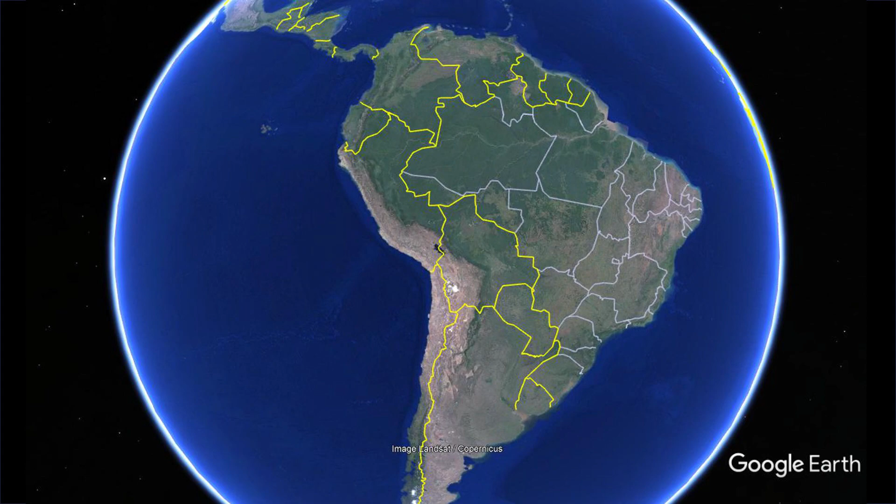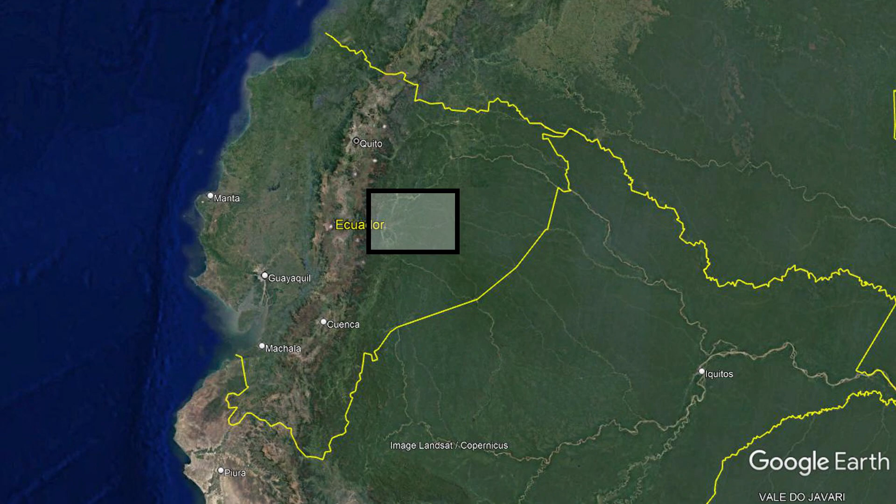The first thing, I want to show you some pictures from where I come from. This is the jungle in Ecuador. To see where Ecuador is, this small country that you will find between Colombia and Peru. Ecuador is divided in three zones. You can see the coast, the mountains that cross all the country, and they reach over 6,000 meters above sea level. And on the east, you have the Amazonia. There is where our university is placed.

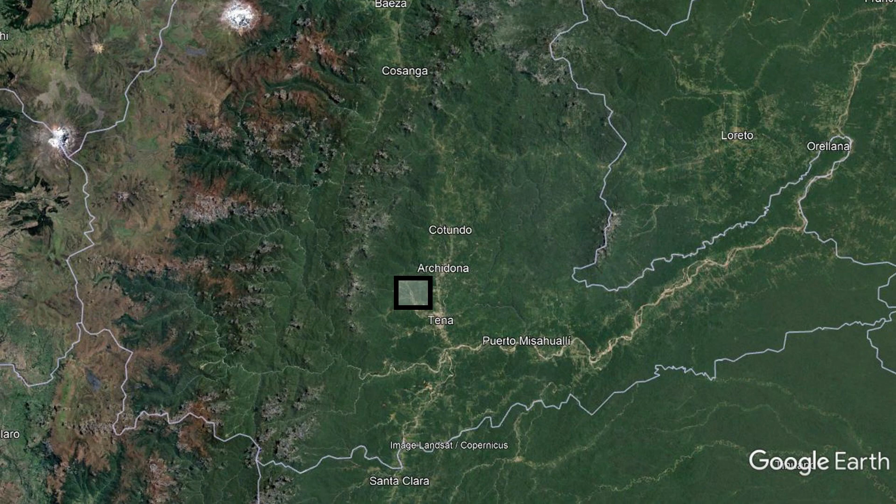You can see here even the volcanoes, these white spots on the left. And the university is just in the middle of the jungle. You can see in this picture. The name of the university is Universidad Regional Amazónica, IKIAM. One of the main things of the university is that it is focused on sustainability and biodiversity. And also we are surrounded by indigenous Quechua people. So that means that a lot of the research projects we do are focused on resolving problems from these people, the Quechua people.

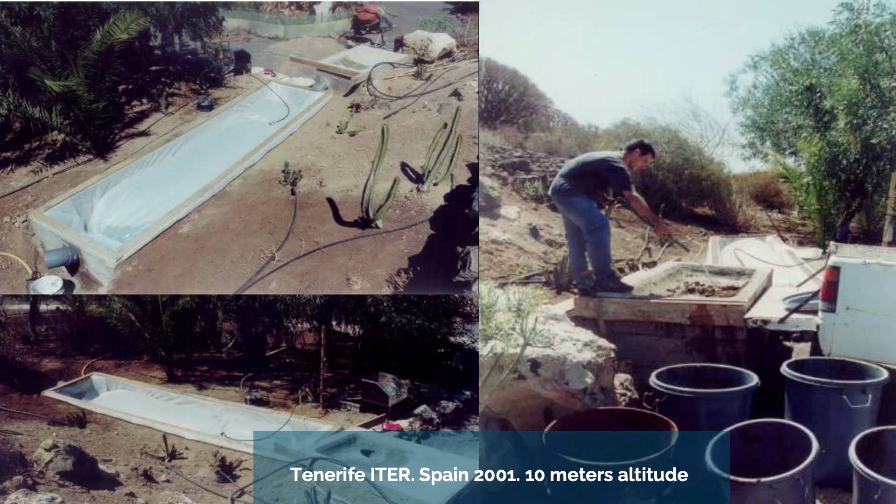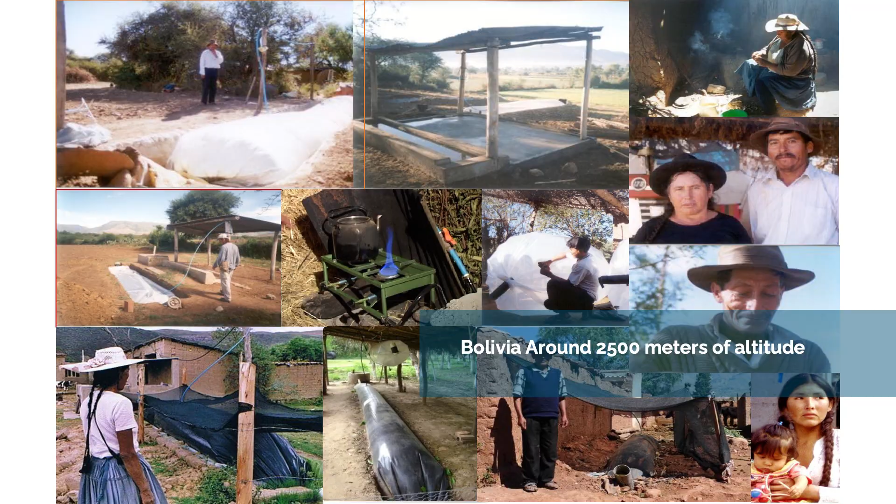So now I can present myself. You can see that this was my first digester. It was almost 20 years ago. It was at 10 meters above sea level, in the Canary Islands. Later I began to work in Bolivia at over 2,000 meters above sea level, doing digesters with Quechua people in the valleys. And later I moved to the highlands of Bolivia with the Aymara people, doing digesters over 4,000 meters above sea level. And in these places you can reach minus 13 degrees during the winter nights.

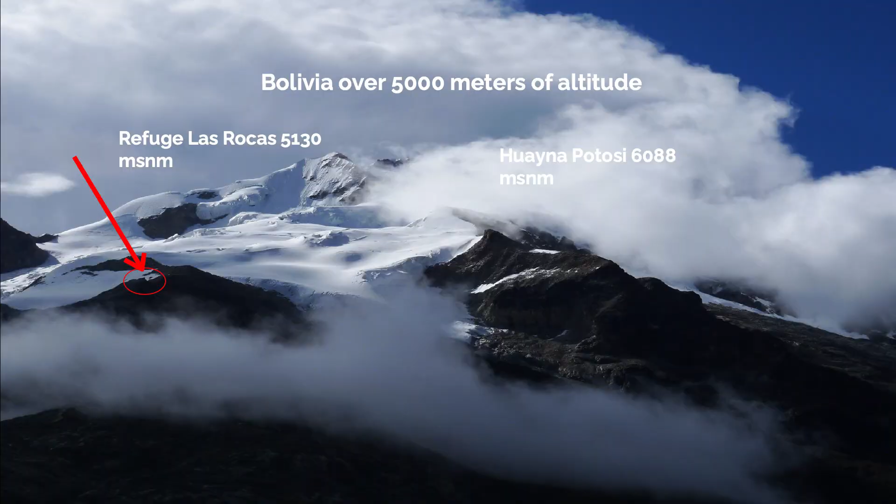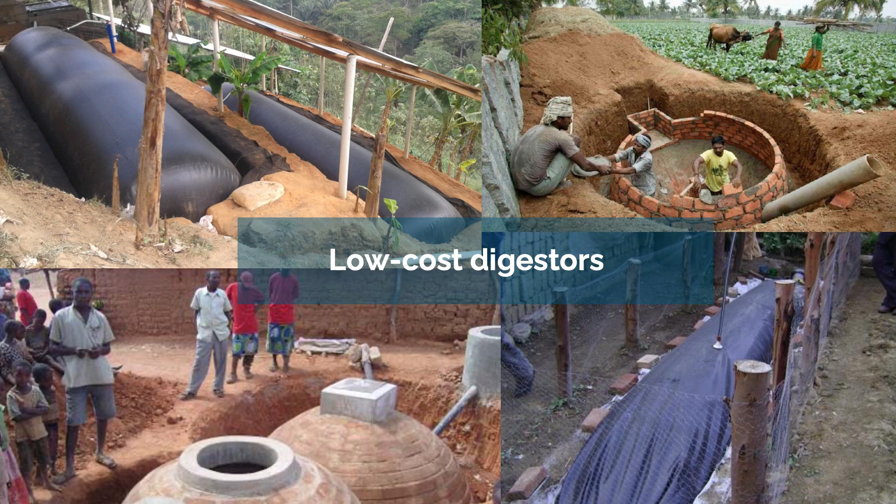The highest digester I have made is over 5,000 meters. It is a wastewater treatment plant in a hut where you go after you try to climb this mountain, and I will talk about this later. So my experience is about low-cost digesters. That means that these digesters don't use any heating or mixing devices. The most famous one is the Chinese model or fixed dome model. You will find a lot of these digesters in Asia and Africa, but in Latin America the most famous digester is the tubular digester.

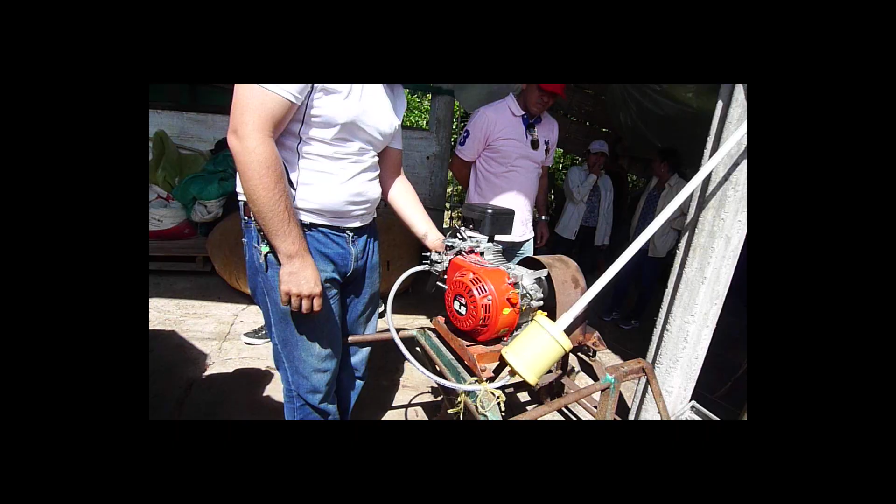Usually these digesters are fed with animal manure from farms. We use the biogas that is produced for cooking or for heating baby pigs, as you can see in these videos. Also, you can run a small machine in a farm to cut grass or to run a small pump, but small machines. Usually it's said in the academia and the literature that anaerobic digestion needs to be heated, needs to work at 35 degrees, but this is not true. In Europe and the United States, most digesters are heated, but in the rest of the world, they are not heated.

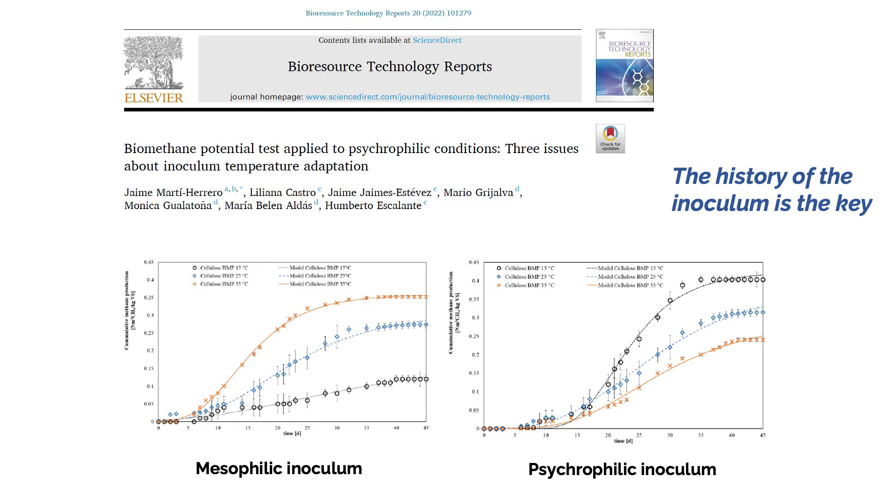Why is this digester producing more biogas than expected? Because the microorganisms are adapted to these temperature conditions. So temperature is important, but we can use microorganisms adapted to low temperatures. Just last year, in 2022, this paper was published where they say it's not only about mesophilic or psychrophilic microorganisms. We also have to talk about psychrotrophic microorganisms, which work at temperatures near 20 degrees. So this can explain why we have such good results at low temperatures.

What happens in the laboratory is that usually they are not measuring how much biogas you produce at low temperatures. They are measuring the thermal shock the microorganisms suffer at low temperatures if they come from high temperatures. There are also some papers that say you can have anaerobic digestion even at 4 degrees. So I share with you also this paper.

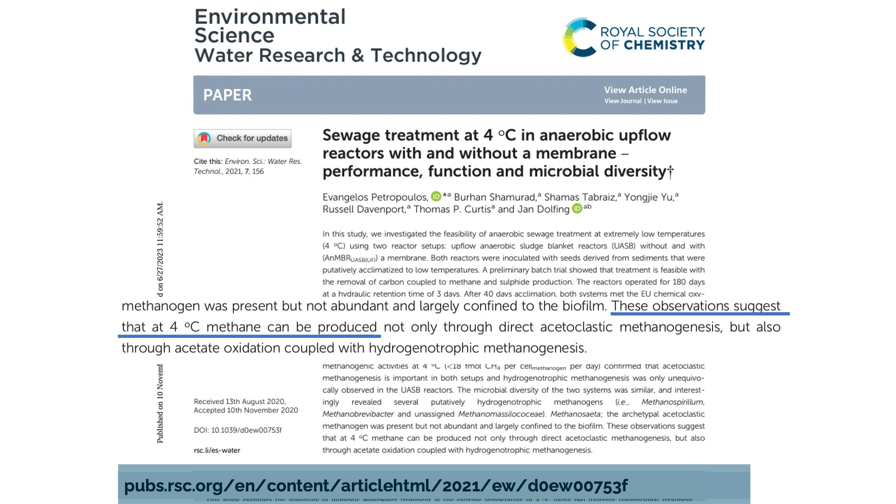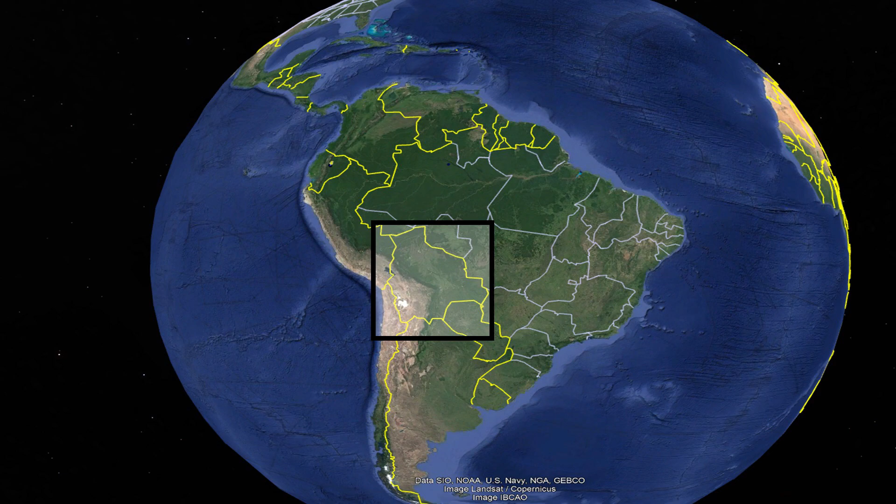So now I'm going to show you some experience in Bolivia. Bolivia is this big country in the middle of Latin America. 60% of the country is Amazonia, but I'm going to talk about experience in the highlands. These highlands are usually around 4,000 meters above sea level.

First of all, I want to talk about an experiment we have made near Lake Titicaca, near La Paz. This is the highlands of Bolivia. It's a very flat place, but very cold during the nights and also during the winter. It is almost over 4,000 meters above sea level. The population is rural people who belong to the Aymara indigenous nation. They have a lot of lack of infrastructure. There are a lot of poor people there.

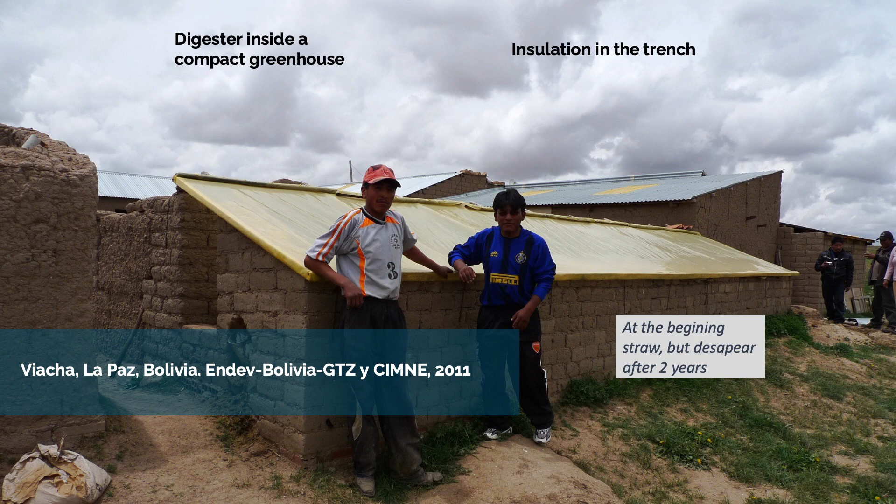So we began doing some digesters to treat manure from animal farms. You can see here a digester just inside this greenhouse. The greenhouse is made with greenhouse plastic. And we used to put insulation in the trench. This insulation at the beginning was straw, but after 2 years we saw that this straw was lost, so no insulation. We decided to try to improve this kind of technology. We also had some problems with the cover of the greenhouse, because it gets damaged after 2 or 3 years because of the sun and the climate conditions.

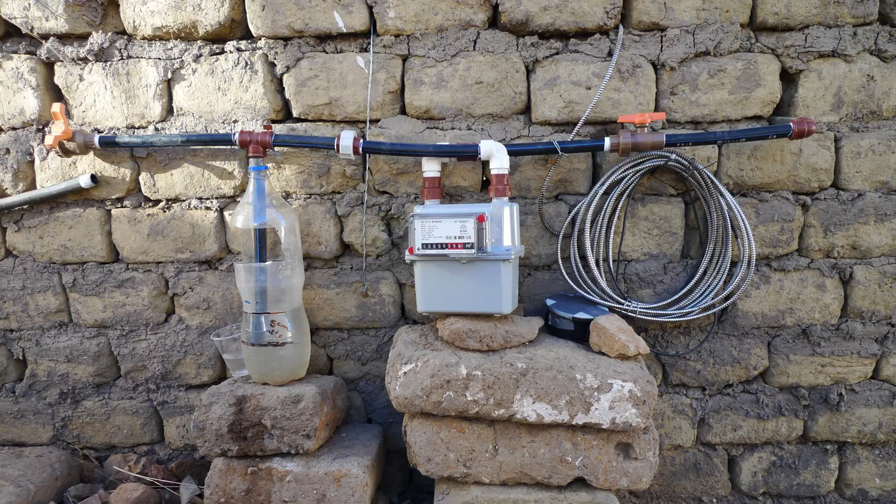We have been working with the public university of La Paz. In these conditions we built 10 digesters like these ones that you can see in the picture. We were trying different things, different ways to feed these digesters and different experiments. We were measuring all these digesters, how much biogas they were producing, and also the thermal performance of the digesters. And one thing we learned is that, for example, you can put soda bottles inside the digester and you will increase the amount of biogas produced by 50%.

Why? This is because the microorganisms need to be attached to a surface. So if we put these plastic bottles, cut, inside the digester, we will have more space for the microorganisms to colonize. So when we talk about soda bottles, we talk about this kind of bottles, normal ones you can find in any wasteland.

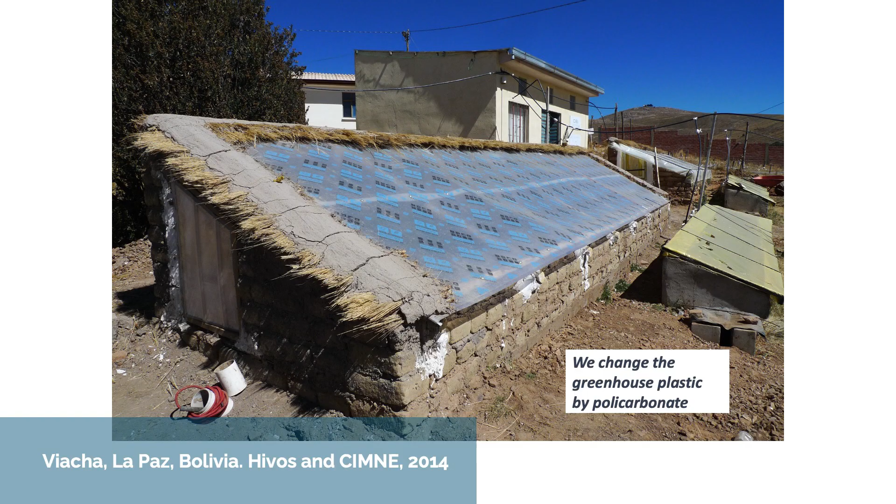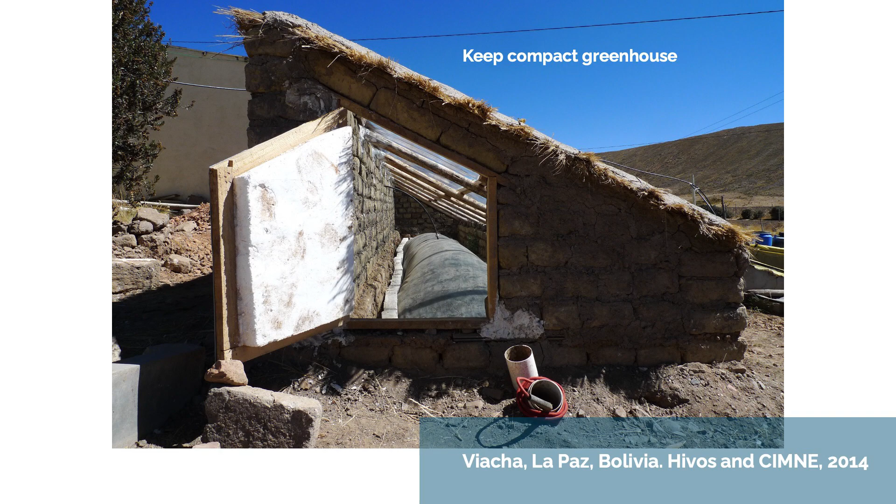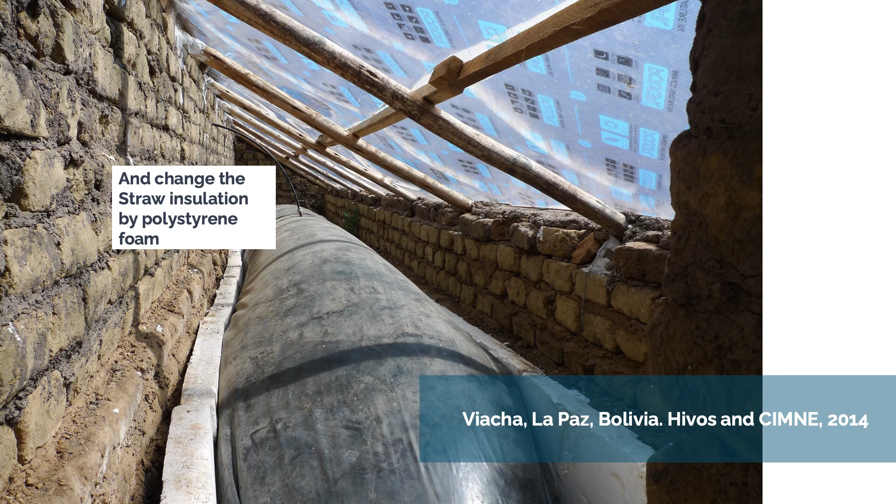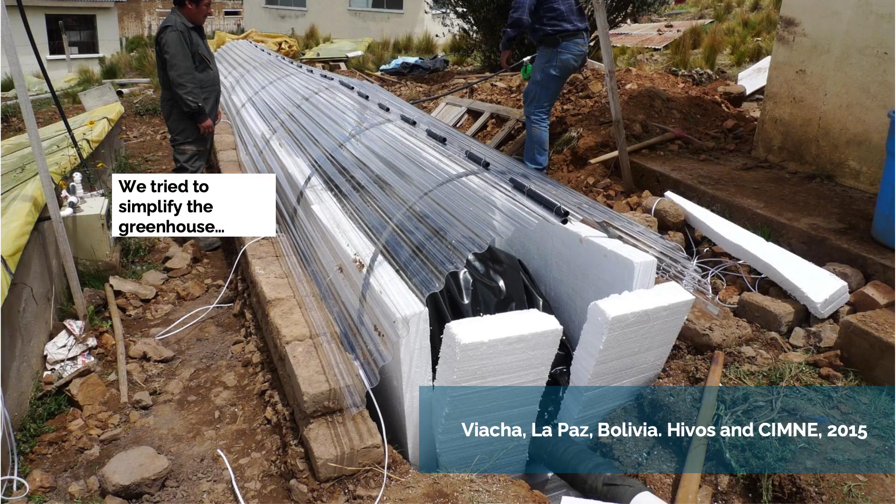And this is a picture, for example, from the greenhouse, the problems that we get because of time and the high solar radiation. So we moved forward to change some components of these digesters working in cold climate conditions. We changed the cover. We never use greenhouse plastic anymore. We changed it to a solid polycarbonate cover, and we changed the insulation to this kind of polystyrene insulation. Also, the reactor is always black to gain heat from the solar radiation. With these conditions, we can get 8 or even 10 degrees inside the digester above the mean ambient temperature of the place. So here you can see some pictures inside the new greenhouse.

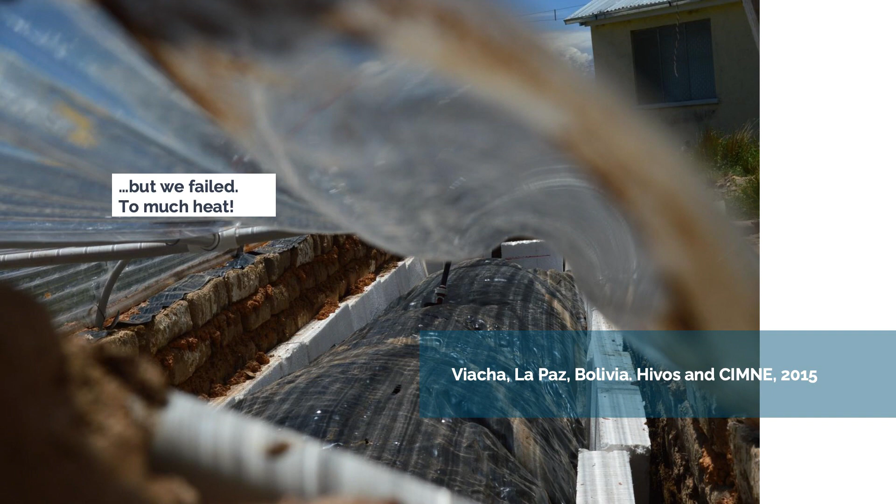We have been trying to improve this greenhouse to make it easier to build. We tried there in La Paz to take out these adobe walls, but we had some problems. For example, we reached too much heat inside the greenhouse, so we melted the plastic of the reactor. So there is a limit when you try to heat a digester. You cannot heat as much as you want. You have to consider the limit of the materials. You can see in this picture how the plastic is melted because of the temperature we reached inside the greenhouse, around 70 degrees.

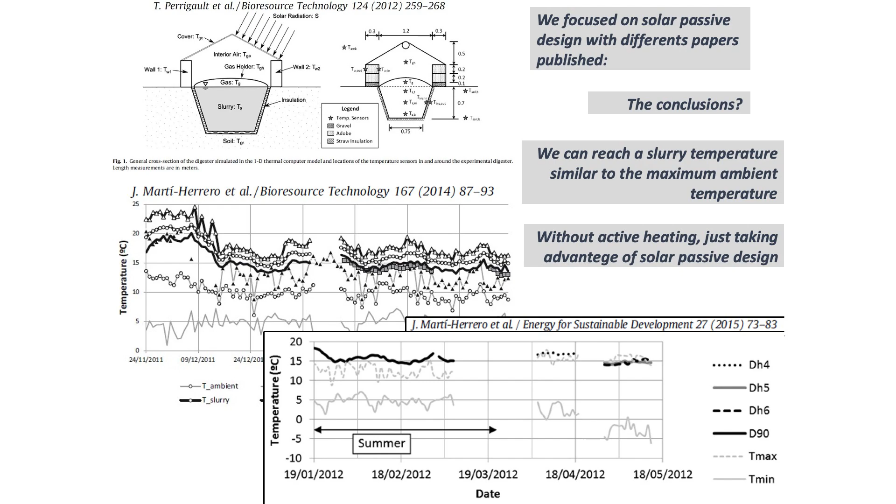We have been measuring and publishing a lot of research on the thermal performance of this kind of digesters, and we see that it's easy to work in places where even during the night you reach -5, -6 degrees when you use black color for the reactor, insulation for the trench, and a greenhouse to protect and conserve all the heat.

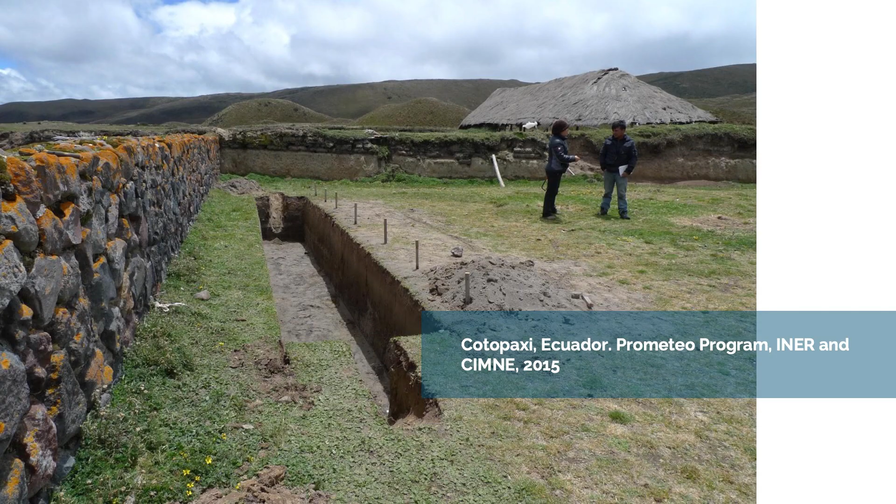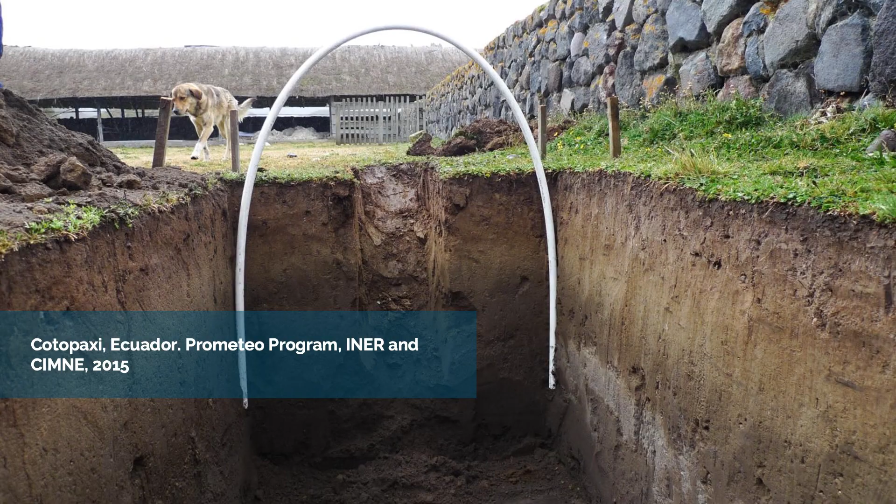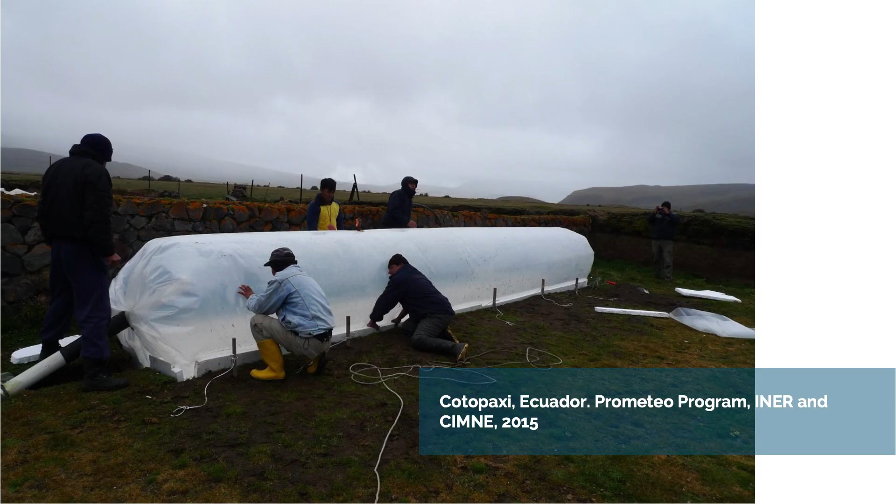Also, I want to show you some experiments we continue doing to improve this greenhouse, to simplify it. This is in Ecuador. This is the Cotopaxi volcano. We made a small digester there. Here you can see the process: the trench and how we expected to build a new greenhouse here. Very easy to do. Here you have the greenhouse, then the insulation, and then the digester. When you build the digester, you have to fill it with air, put it in the trench, and then you begin to cover it with this greenhouse. So this is how it looks at the end.

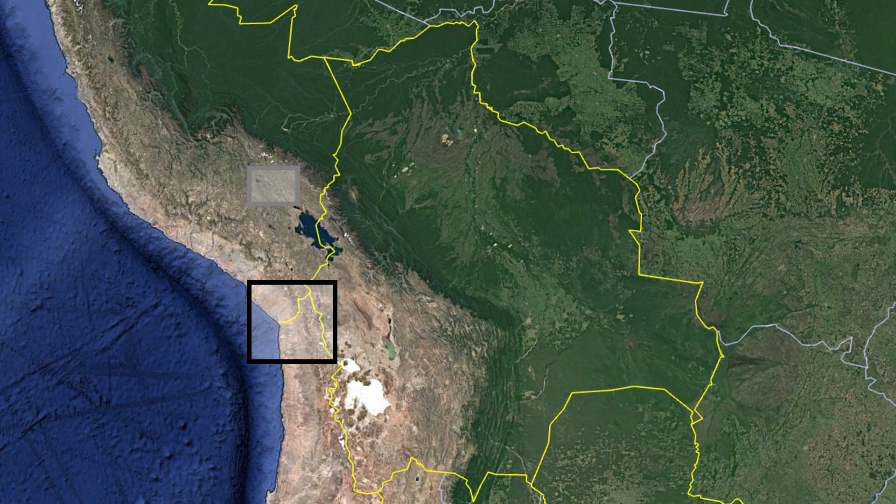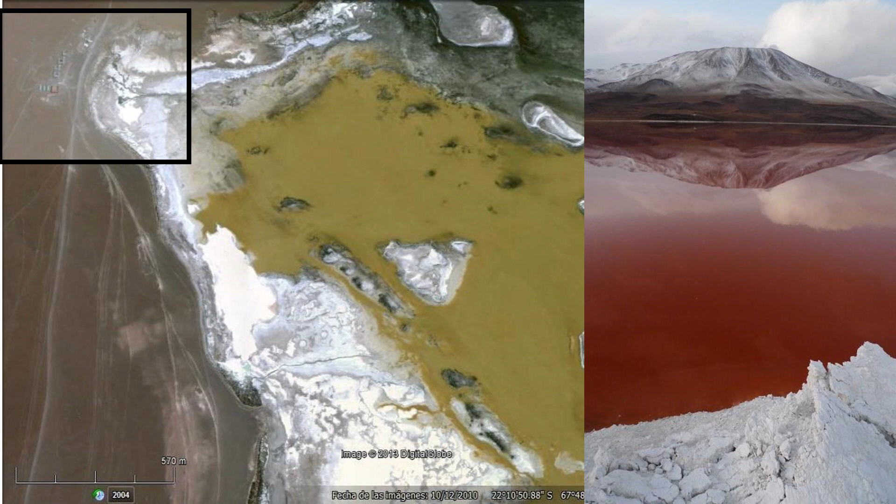More experiences, for example, in the south of Bolivia, very near to the frontier with Chile, near to the Red Lake, as the name is in English. In Spanish it should be something like Laguna Colorada. We were asked to build a wastewater treatment plant for 80 people. So we went there and we did what we know to do, that is to build a greenhouse.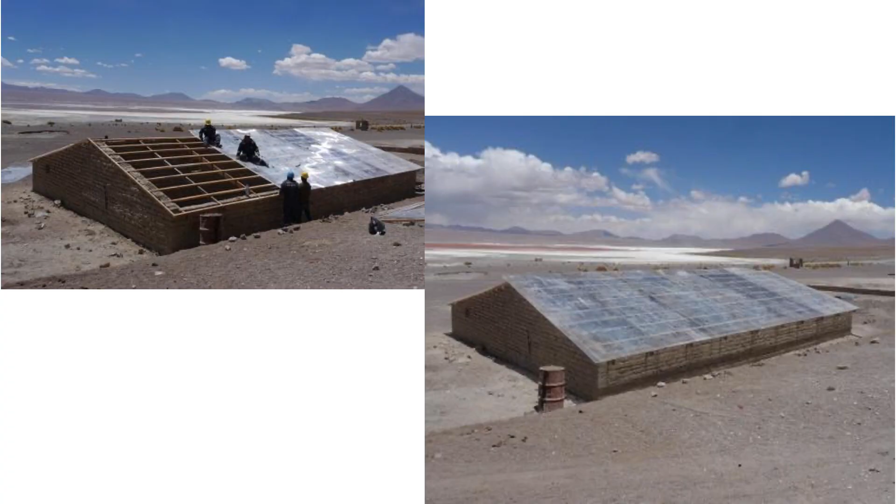This place is over 4,300 meters above sea level. This is the placement where we have been working. The area is very, very dry. It's like a desert, but sometimes you can reach even minus 20 degrees during the night and get very white because the snow fell to the ground. So what we did is to propose a big greenhouse covered with a polycarbonate roof.

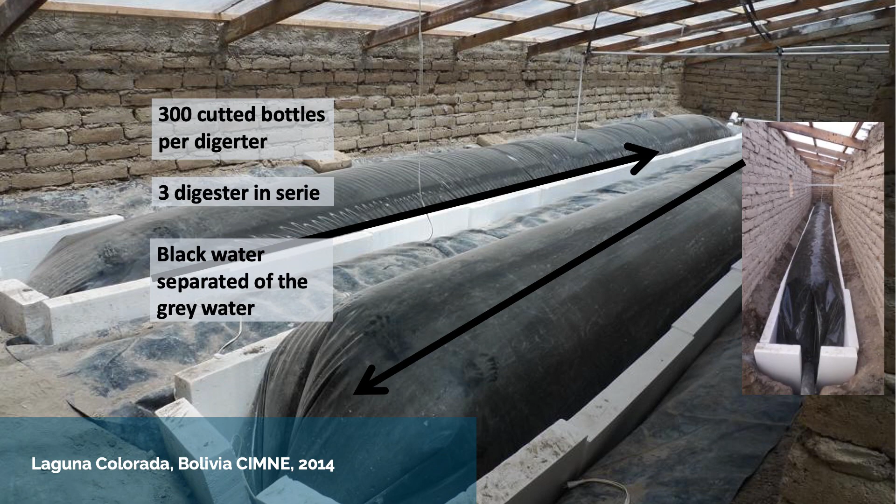Inside the greenhouse you can find these digesters. They are 9 cubic meter digesters each one. The insulation is 20 centimeters wide, and inside each digester we put 300 plastic bottles to increase the surface that the microorganisms can colonize.

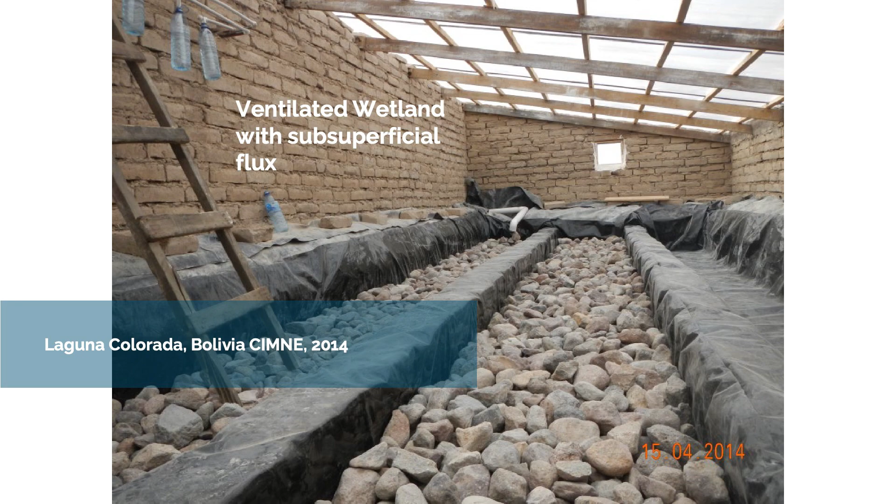We separate grey water from black water, so the black water from the toilets went directly to these 2 digesters, and later it joins with the grey water. It's mixed with the grey water and they go to a 3rd digester together. And from here we go to a small wetland, also covered, where you can take out all the last nutrients that you will find in the effluent of the digesters.

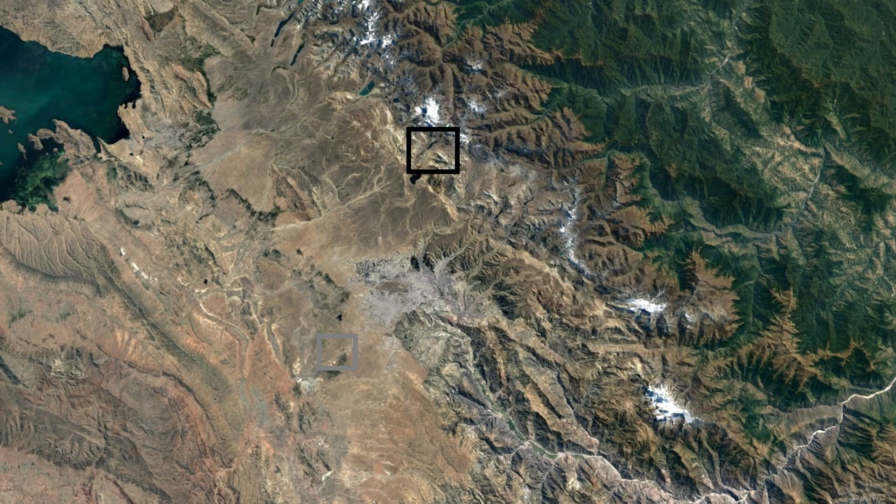And the last situation is this one, in this mountain. This is Huayna Potosí. This is the highest wastewater treatment plant in the world, I think. It is over 5,000 meters above sea level. The top of the mountain is 6,088 meters, and in the middle you have a hut where you sleep the day before you want to climb to the top.

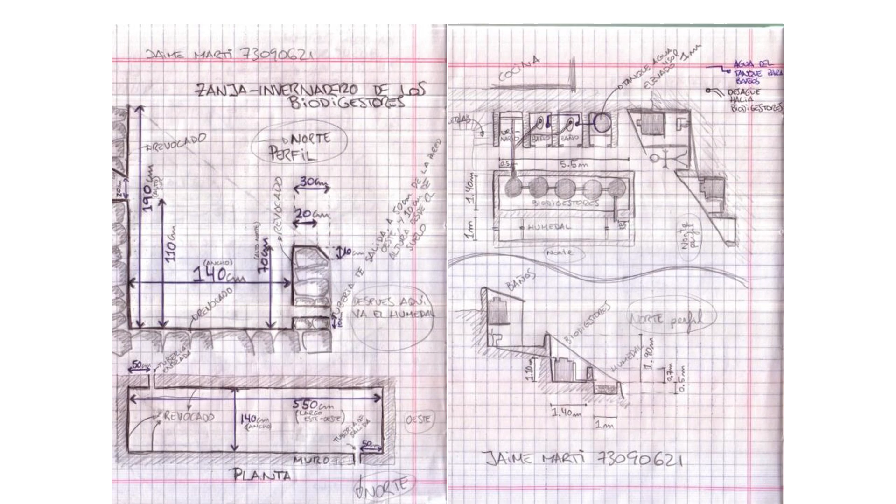So we were asked to build a wastewater treatment plant. Before, what they had was a honey bucket place, but they were not taking the black plastic to any place. They were just throwing it out of the way. So what we proposed is to build new toilets with digesters and also a wetland. Here you can see the place has a lot of stones, so it's not easy to work there.

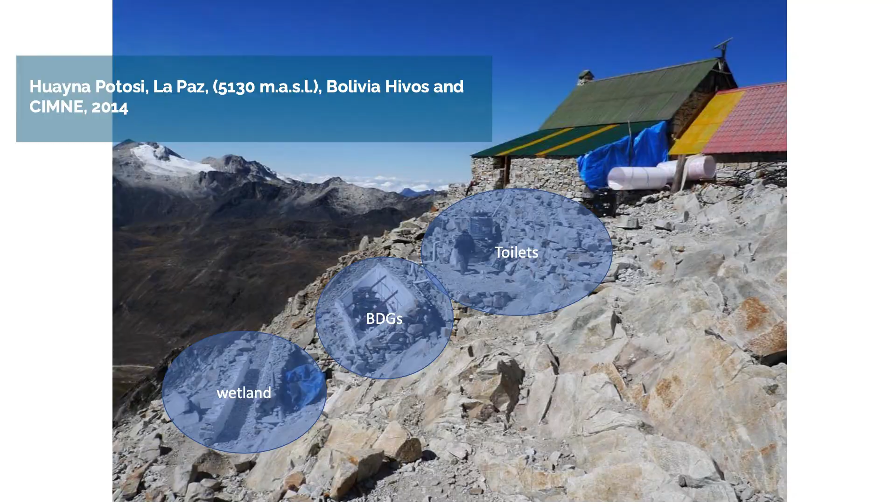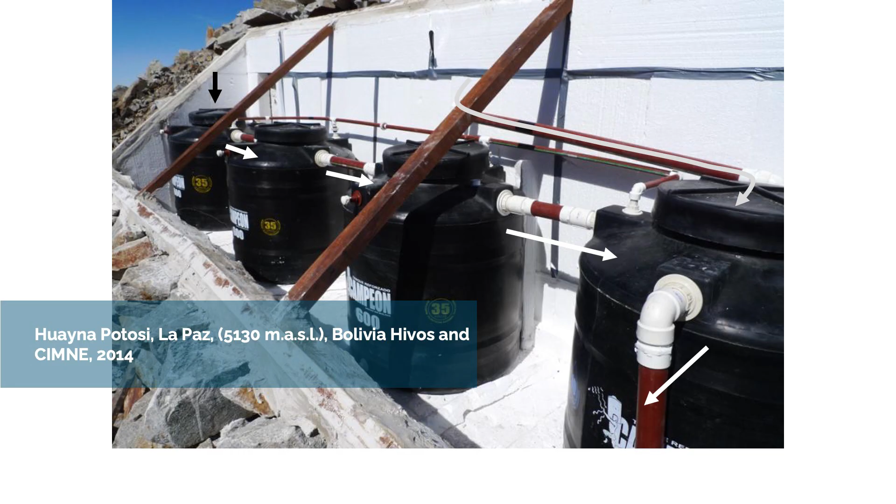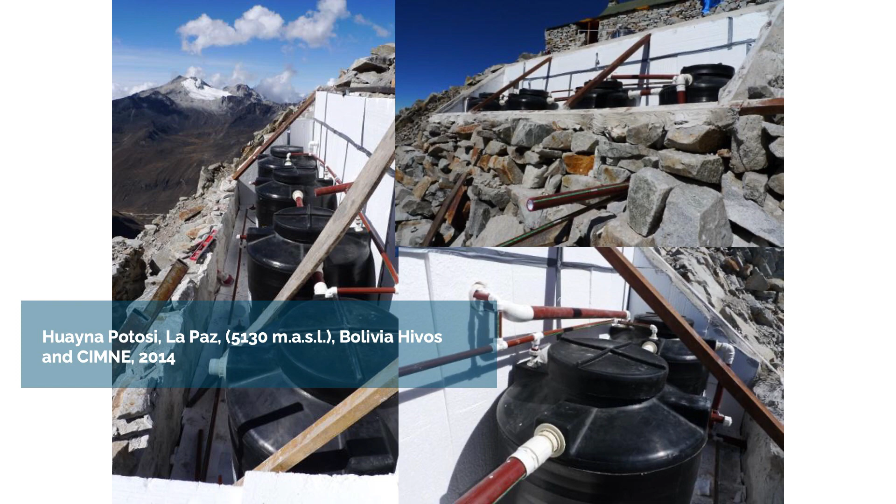Later I'm going to show you the toilets, but here is where the toilets were placed. Here are the digesters, and at the end the wetlands. For the digesters, the idea was to build something very similar to a solar cooking box. So instead of cooking food, we were cooking other types of things. We made these digesters using typical water tanks that you can find in any place, in any country.

And what you can see here in these pictures: the 3 first tanks receive the black water, and just the last tank receives the grey water. So this is how it was working. This system is still working, and it was more or less 10 years ago. They are happy with it. We have no data about this system. What we know is that there is no smell. The people that manage this hut are happy.

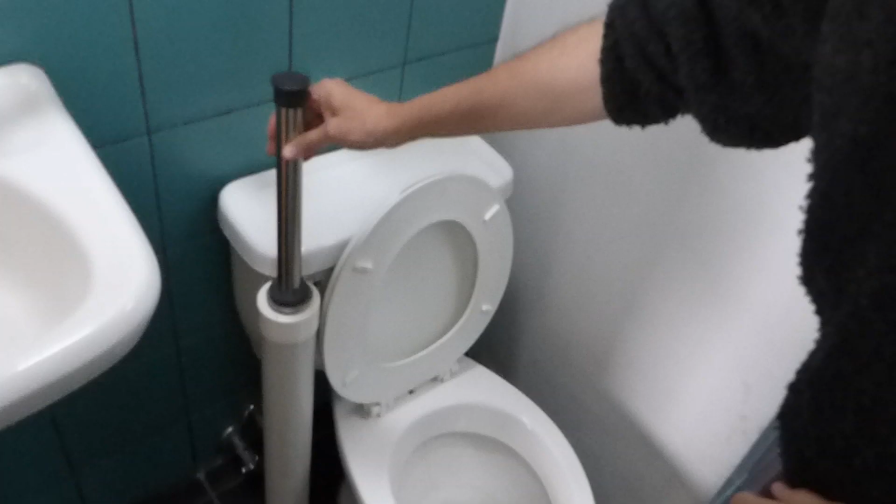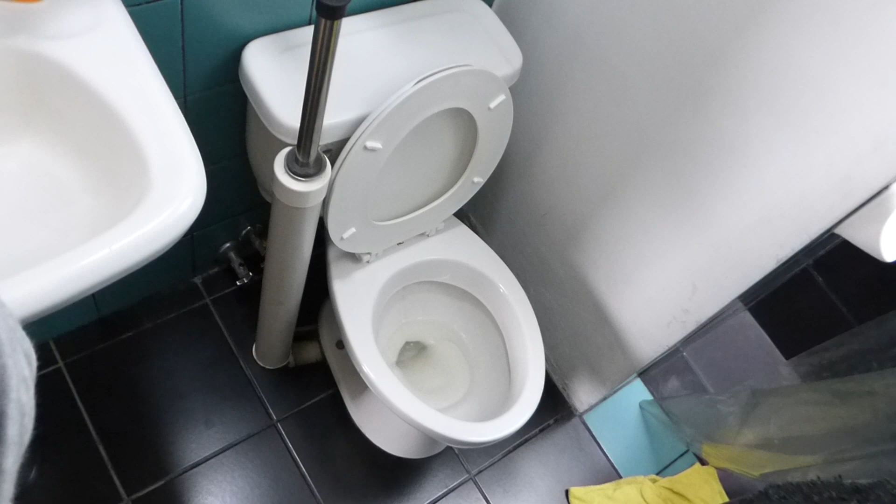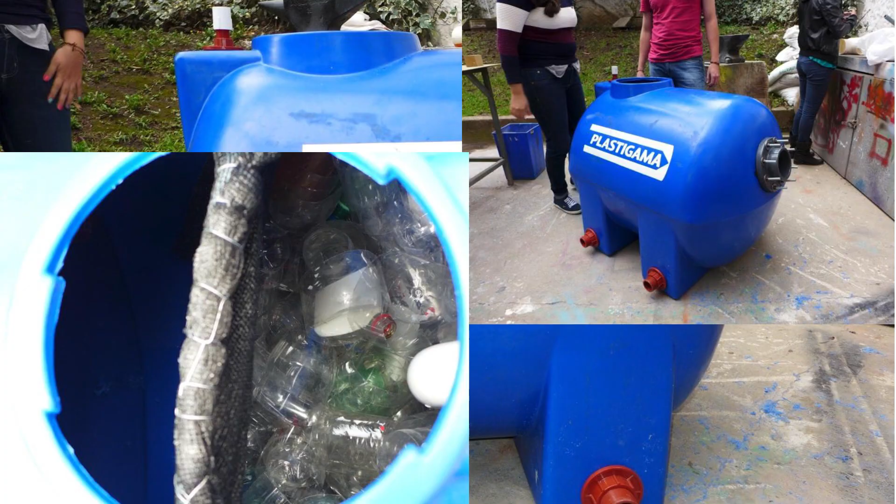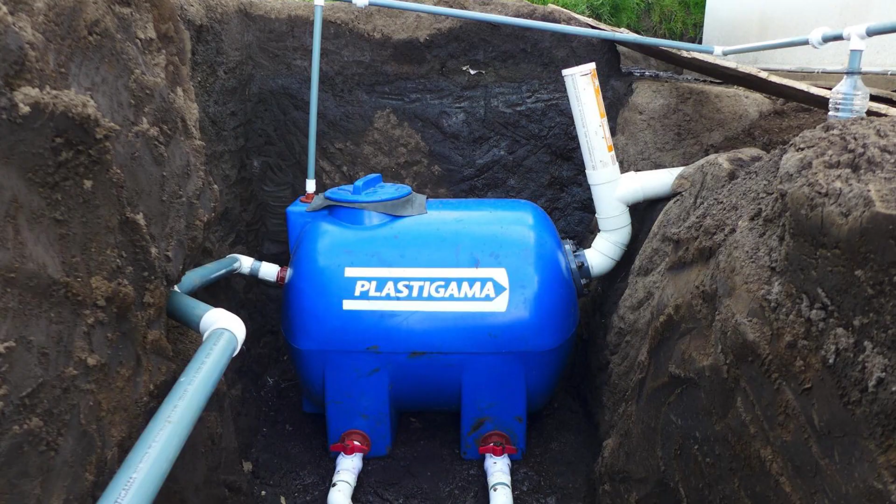So we made a small digester for these kinds of toilets. We used, again, materials that you will find in any shop. This is a small digester. We divided the digester into 2 chambers, one of them full of soda bottles, and we installed this digester. So with a very small volume, this was 500 liters, you can solve the problem when you are using just 1 liter of water per time you go to the toilet.

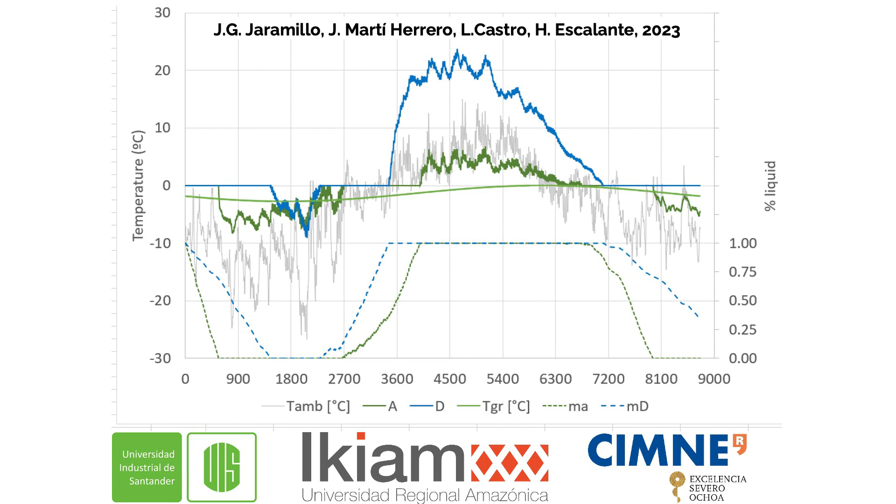So just at the end, this is a simulation of the thermal performance of a digester, for example, here in Sisimiut. This is what you can find here. The blue line is the thermal performance when you are using black color, insulation, and greenhouse. And what we see is that it's going to get frozen during the harder part of the winter, and the digester is going to be working only 6 months per year.

Just to finish, conclusions: we can adapt microorganisms to cold climate conditions. If you work with the digester in cold climate conditions during the first 12 months, the microorganisms will be adapted to these conditions, but you can also use native microorganisms that are already in the lakes here, for example in Greenland, and put them inside the digester. You just need to do this once, because after this they will colonize all the digesters. So you can take this kind of microorganism from any pond inside the city.

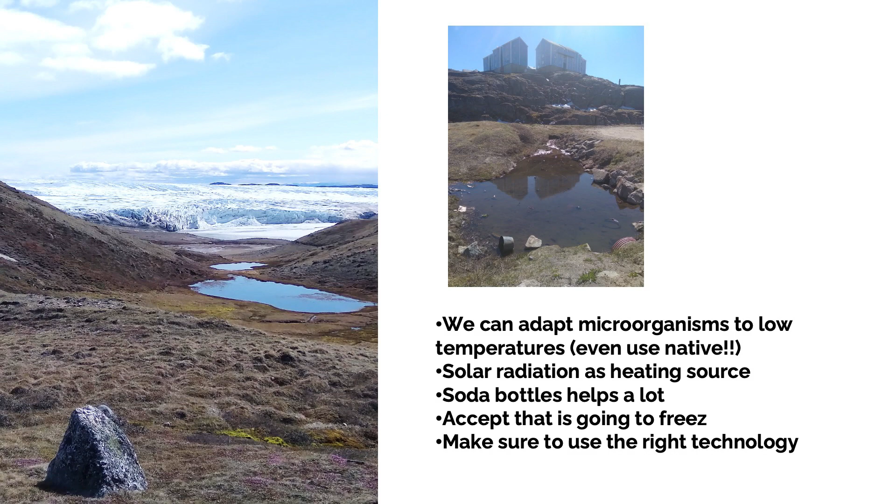You can use solar radiation as a heating source. You can use soda bottles to increase the surface. You have to accept in these conditions that the digester is going to get frozen for almost 4 months per year. So you need to think how to store the manure for these 4 months, and after that you will put it inside the digester.